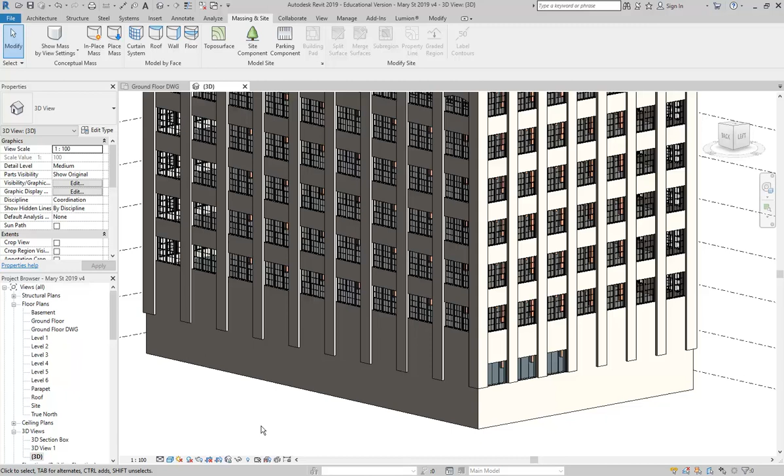Okay, so I've got my building shell starting to come together, but before I can go much further with these storefront openings, that I'm just coming back around to show you on the corner there, Reservoir and Mary Street. You can see that most of them are at the same street level, coming around to Mary Street, but then it starts to rise really from about here, and you should look at putting in these other different openings

as well. So you've got a garage opening there, and these, do you know what these things are? Yes, they're fire escapes. So that's really important. For interior design, you will often need to think about those things. I know sometimes people will tell you you don't have to do the hard construction work, but having done your construction classes earlier today, you definitely need to look at that as well. And so that's going to be part of your design, working out where the fire escapes go in.

Have you had a look at the requirements for fire escapes? Okay, you should be starting to look at that. So it's in volume 1 of NCC, BCA. Do you know which section of volume 1 it is? There's some light reading for you. If you haven't read through this already, you need to go and read it. It's section D. So for interior design, you're expected to know that section almost off by heart, and so you need to start looking at that as well.

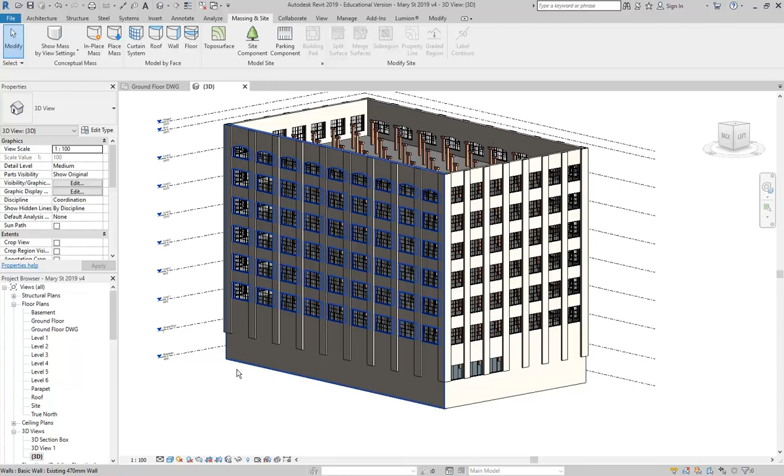So we've got the street level now coming up to the corner there, where it's a metre roughly above ground level. I'm just going to round it off and make it 1,000, or a metre. So at that corner point, that's what we're aiming for, that metre above the interior floor level. So back to Revit. I'm going to go to, sorry, not the ground floor plan, I'm going to go to my site floor plan.

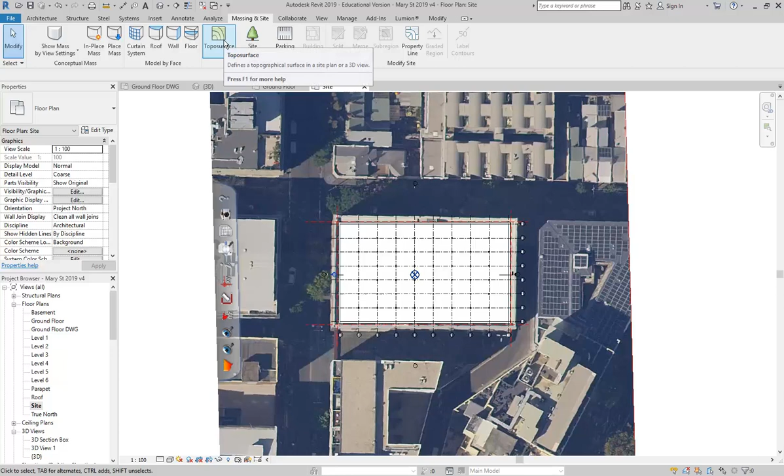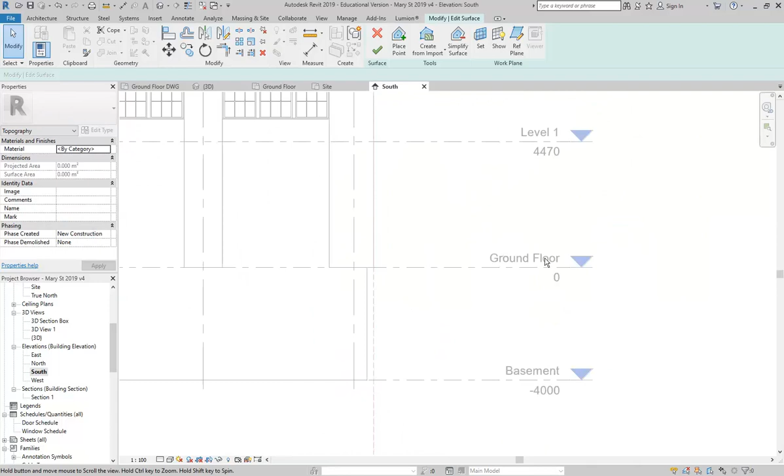And then you can see on the Massing and Site tab, you've got the Toposurface tool. Now, notice it begins with this place point option, and then you can see the default elevation height is 0. So before I place a point, I'm just going to switch to an elevation so that you can see my levels. Your levels probably will be the same height, but you just need to be aware of that. So I've got the ground floor there at 0,

and again looking at the Mary Street and Reservoir Street facade, you can see there's not much of a step, but even though this is almost flush, you can see here there's a little bit of a step over there. So how high do you think that step would be? Yeah, a brick, or 10 centimetres, that's good. So a brick is about 76, 86 with mortar, but if you round it off to 100, that's fine, and it's good to work in round numbers, so 100's good.

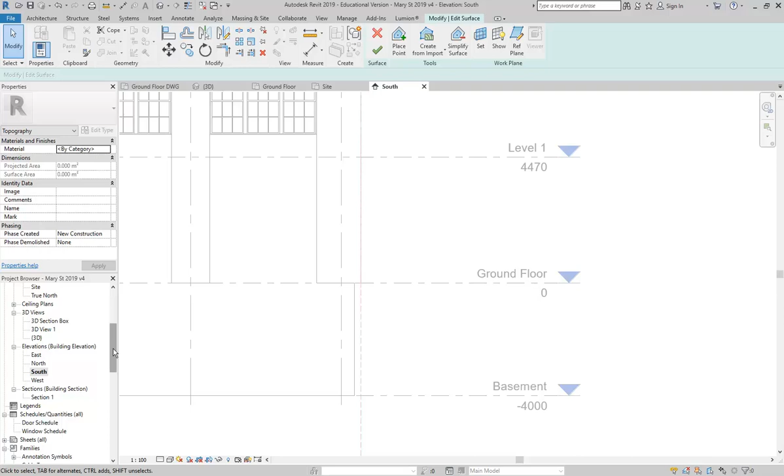And so it's also good to have it below the floor level, because if we make it flush, then our ground surface might cover the floor inside anyway. So again, you need to just think about the heights before you go and start placing points. So I've switched back to my site floor plan, and now notice I've lost that option to change the elevation because I've gone and used some different tools.

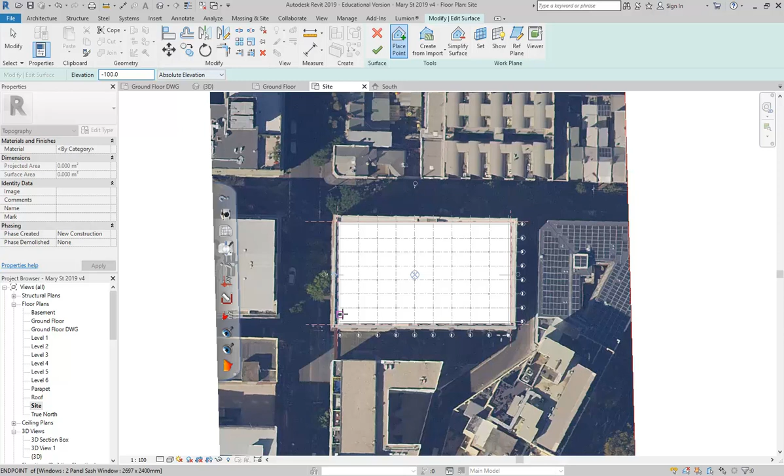So you've got to know that it starts with that place point option, but if you go and do something else, you just need to choose it again, and then you get the option to set the elevation. So I'll make it minus 100. Yep. And then this is the facade I was just looking at. So here is the Reservoir Street frontage.

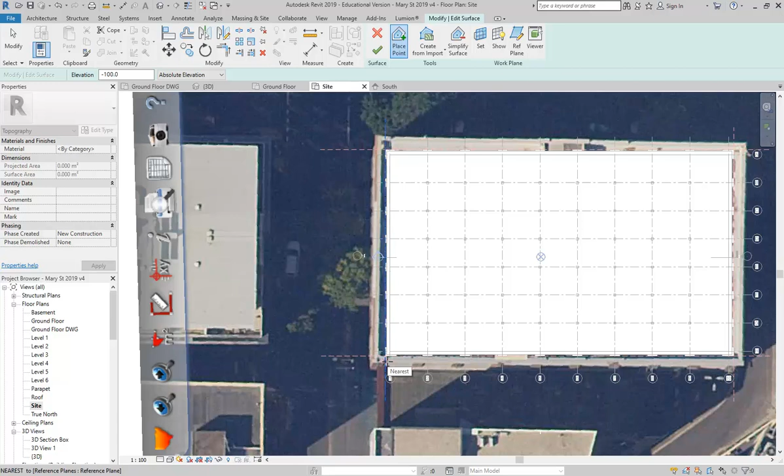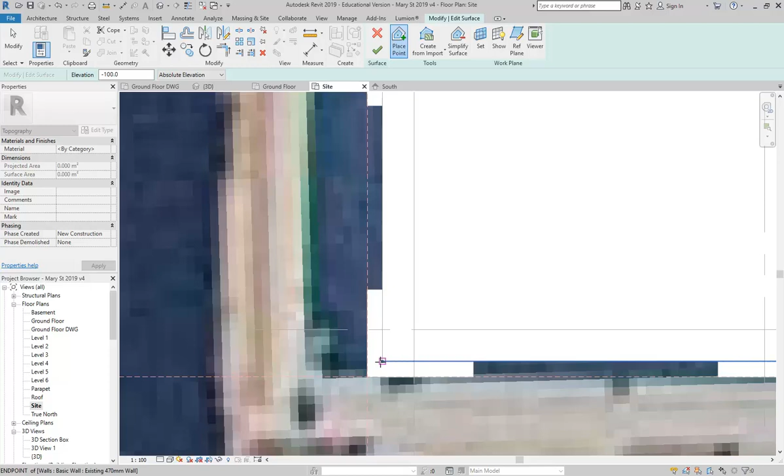And again, we said we're going to make that entire street front the same level. So here I'm zooming in just to get the corner of the building. It doesn't really matter if you get the outside or the inside there of the wall. You could do both points if you're not sure, it doesn't really matter. And I'm going to go to wireframe so that you can see the points as I place them.

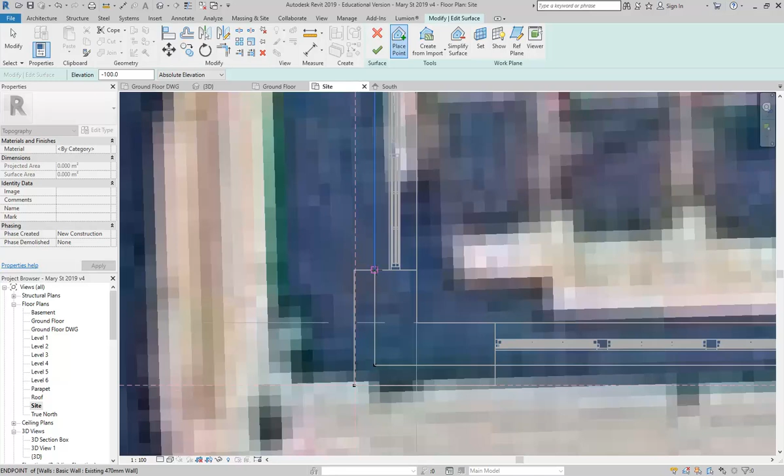So there, zooming in a bit, you can see those two black dots are the 2 points. And because I've only placed 2 points, there's no surface yet. You just think about it logically, you can't have a surface with less than 3 points. So you'll see when I click the third point, I'll just do another one here, then I get a surface. It's just like joining the dots.

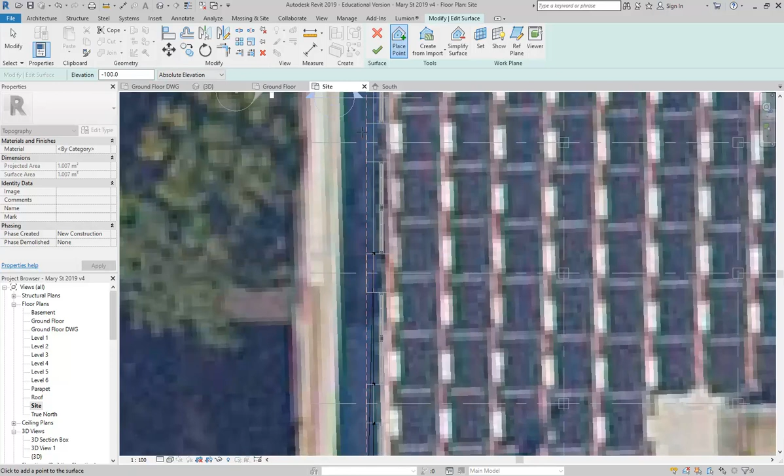So then I can keep clicking more points, just a few along that facade. You don't need to do every single point. And, okay, so at the moment it's a very thin little strip of a surface. So to make it a bit bigger, we want to see the streets and the other things around the building. So I'm going to click some points over here, and then maybe over the other side of the street, and just keep bringing that out. And you can see then that we've got a surface now that's much larger.

And again, you need to think about the reality, which is that this street would probably slope down from here. Right, if we know that the high point is up here, the ground probably does slope down in this direction generally. And if you've walked there, you'd know it definitely slopes up from, you know, this is where Central is down here, and the street slopes up this way. All those streets in Surry Hills coming up from Elizabeth Street slope up towards, what's the top of the hill there?

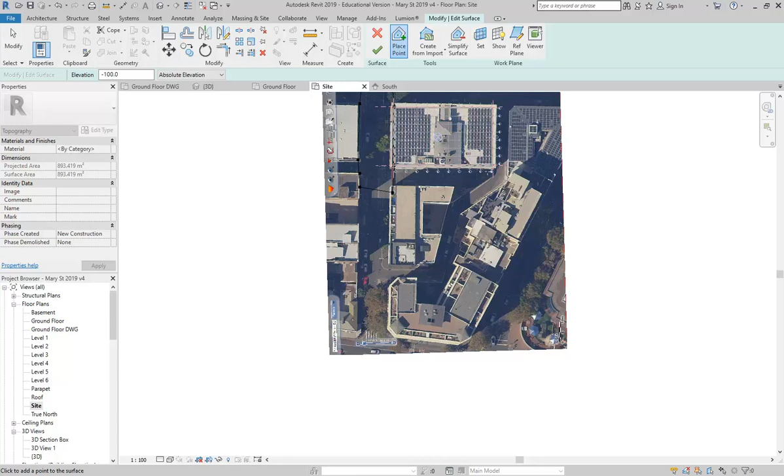Obviously don't go to the area much, but some of you must. What? No one goes to Surry Hills anymore? What? Okay. Oh, right. Okay, yeah, they've killed it. Now that people don't go out in the city anymore, I suppose people don't know. But this used to be one of the main areas people would go out. And so there are lots of pubs and things on the main road up here. Oh, no, sorry, further up the hill. So it's quite a well-known street.

Crown Street is the main street that runs up the top of the hill there. Right, and you'll see it's a big slope. So the hill runs up Reservoir Street to Crown Street at the top there. And that's basically the top of the hill.

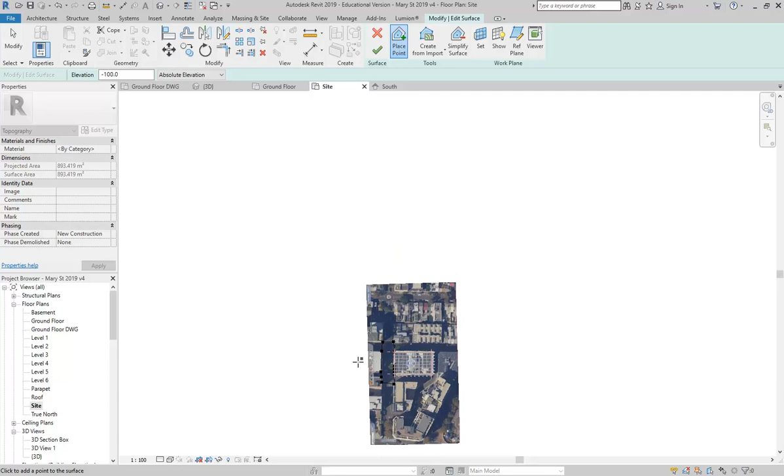There used to be a well-known architecture firm just near there called Ancher Mortlock and Woolley, which is about here somewhere on the other side of the hill. And yeah, just a good area to walk around if you haven't already done that.

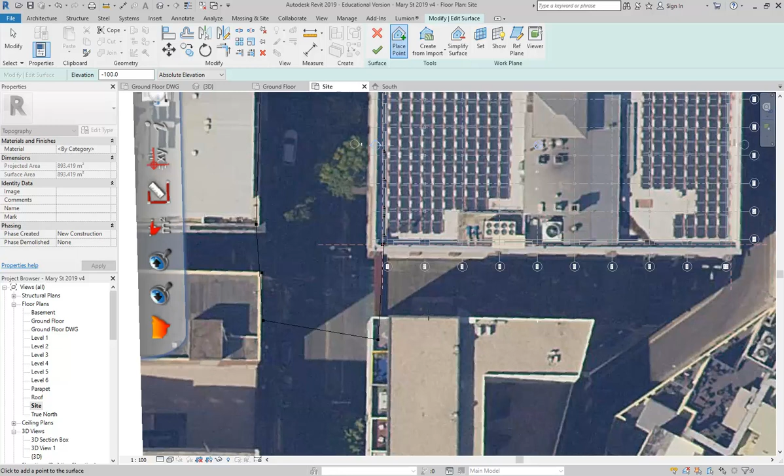And so then I'll keep placing points though at the same height. I just wanted to point out it definitely slopes, but we don't need to show that slope when it's not that close to the building. So I'm going to make all these points fairly flat, in other words, keeping the height at minus 100. But just remember, that's not the way the ground really is. We're just modifying it a little bit. And again, clicking points just to bring out the surface and give myself a bit of room around the building.

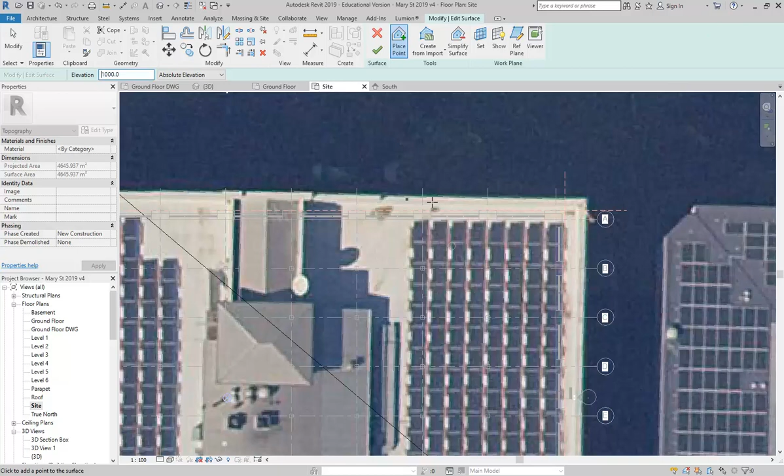And then, what height did I say we want the corner up here to be? Remember? So that's the corner where it rises. So this is Reservoir Street that I've just done. And then coming along, we've got Mary Street. And remember, this is the important part. This point's higher. That's a metre above street level, we're going to say. Again, just keep it as a round number, so I'll say 1,000. So I'm going to type in here for the elevation, 1,000. And then make that point there, the corner, 1,000.

And I'm going to click some more points near that, just to give myself more room to work with and to extend the surface out further from the building. Now, before I click a point down to the right here, I'm going to change the elevation again, this time to about 500. Because if I leave it at 1,000, then it'll slope from this side to the left. And I don't want it to, I want it to slope from the top right down to the bottom left. Something like that.

And then again, just to make it even better, I'm going to click another point inside the building where I think it'll be about 500. So if I said this is 1,000 and that's 0 or minus 100, then 500 would be roughly in the middle of the building, or maybe about there, just use your judgment. And another couple of points over here. And notice how the contour line is changing.

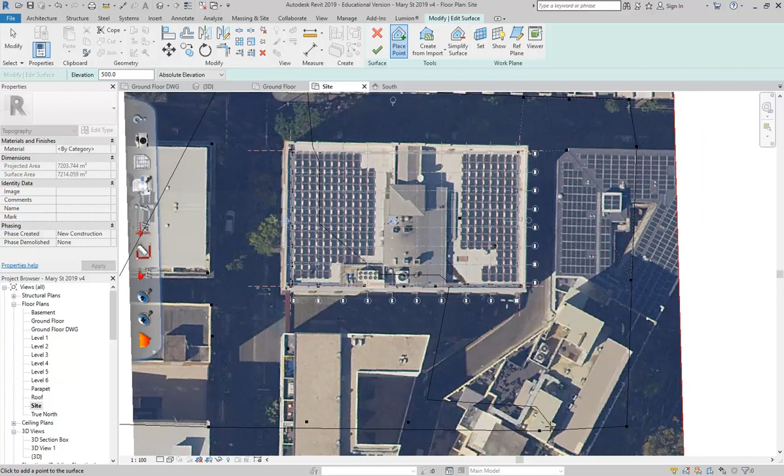So it generates the contour lines automatically. And you can control it, so if you want to change the height and see what happens, if I make this say 300, and then I'll put some points here along the road, you can see that that contour line, again, is going to move. Make it maybe 100, and then put another point about there, about here.

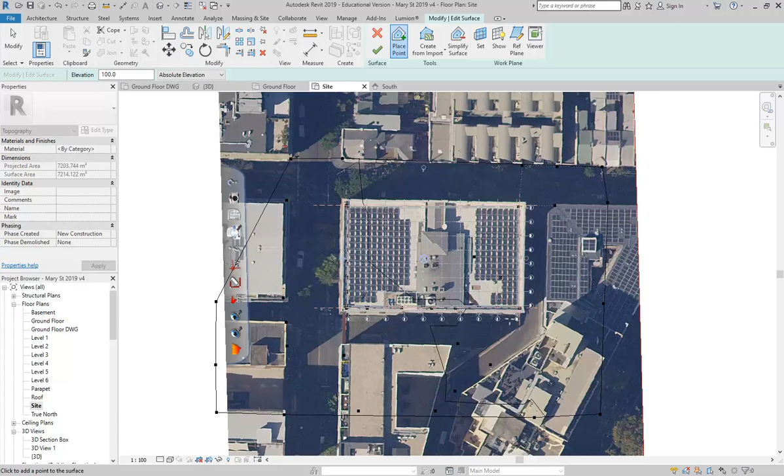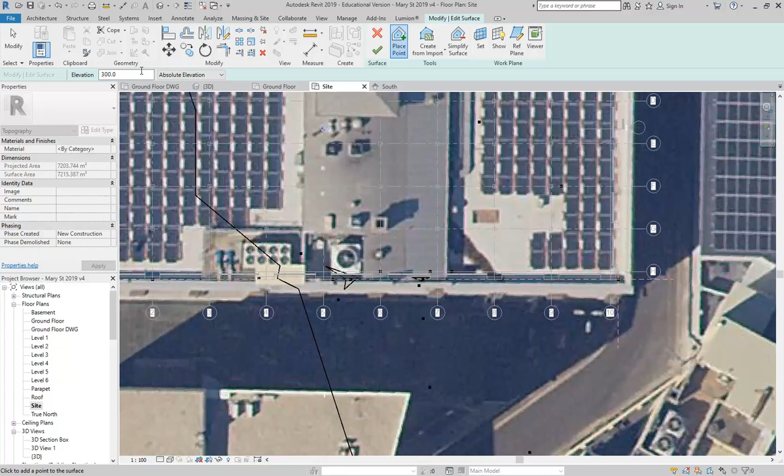And there we go. That one's a bit annoying, so I'll just maybe put in 300 again, and then just put a few points around there. Don't know why that won't go away. It's a bit unpredictable sometimes, the way it does this. Yeah, that'll do.

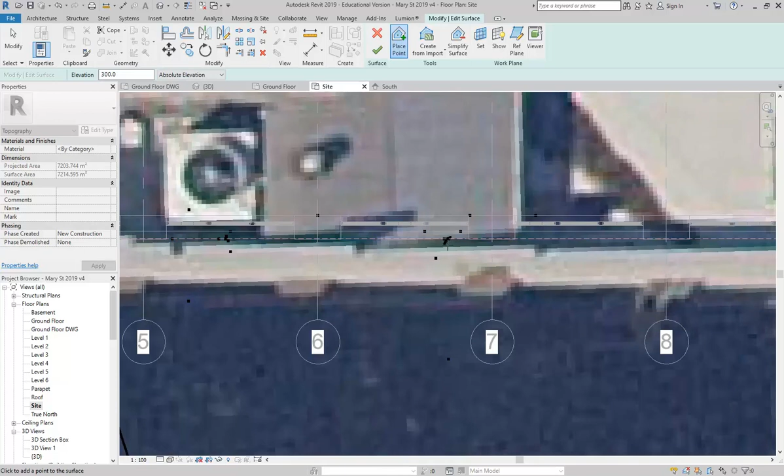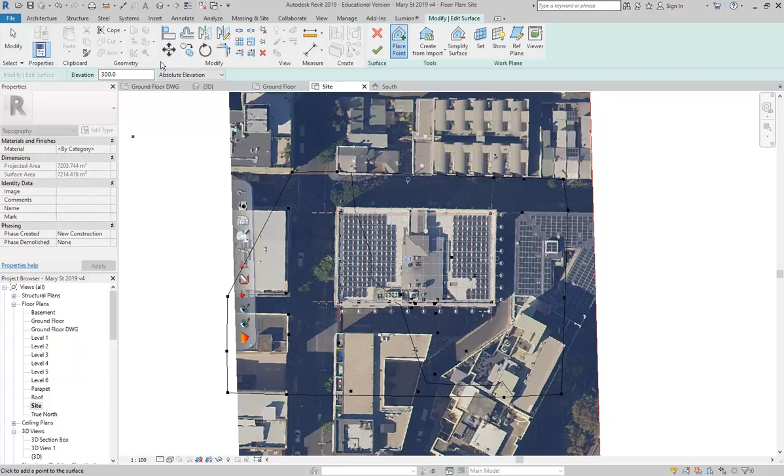Don't be too fussy about these points, and as long as you don't put in huge variations in height, it won't really matter too much, as long as you've got the 1,000 at the corner here, minus 100 along Reservoir Street. But then, well, actually what I'm going to do is, before I show you the next part, I'm going to finish that and show you how the surface looks.

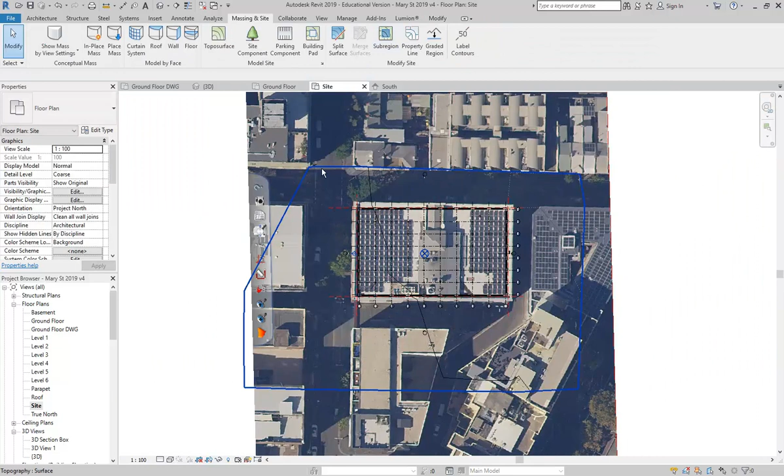So to do that, I'm going to go to this north elevation, and you can see there now the ground surface is sloping. But is that what we want? Do you want it to slope from the corner there diagonally straight up to this corner? Would you want that?

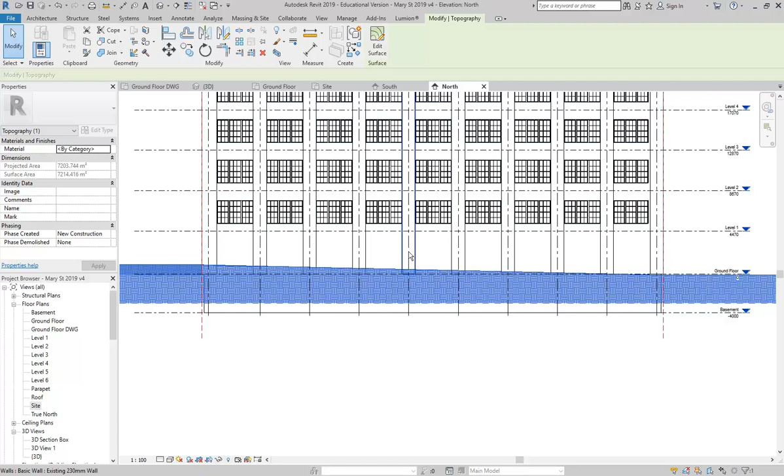Well, kind of. I mean, that's the way it would have been originally. The ground probably would have sloped fairly evenly, but because we want some entrances that are going to be flat, we don't just want that to be a single diagonal slope. Right, so you might have doors here and here. So then you can't have a door with a diagonal entrance or a sloping entrance. Okay, so we've got to flatten some of this out, or grade it, that's what it's called.

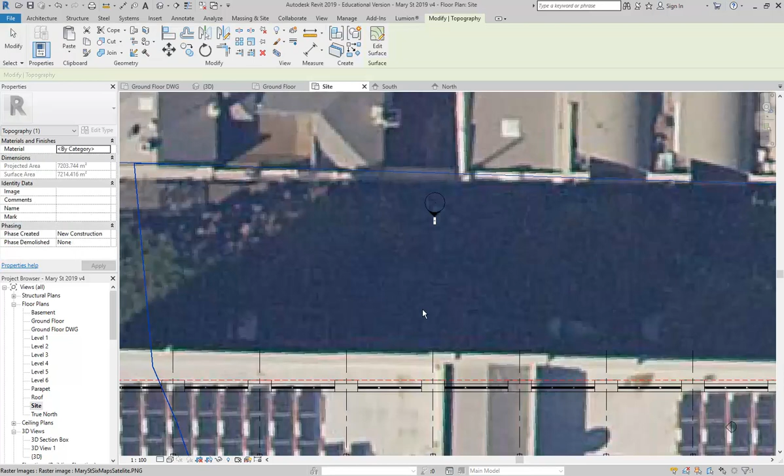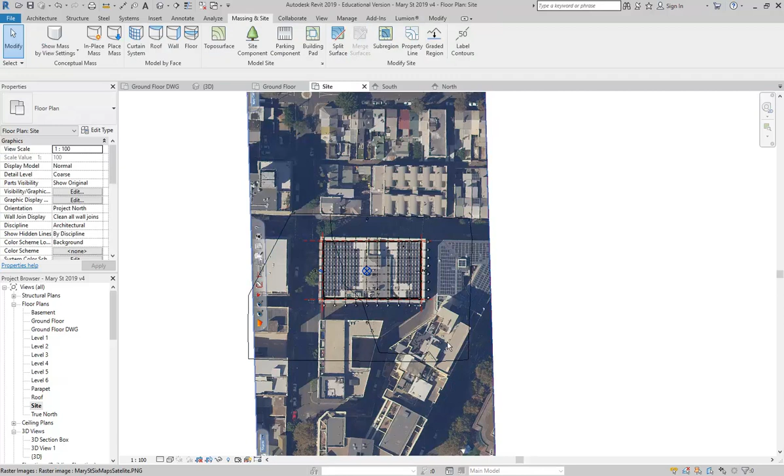So I'm going to go back to my site floor plan, select the topo surface, and then you can just go back and edit the surface once you've selected it. So you'll always get that option. When you select a topo surface, you go to edit surface, and then place points again, and you can keep refining that surface. So I'll change, well, the elevation there, 300, that might be pretty good. So for this area, I might put a couple of points in.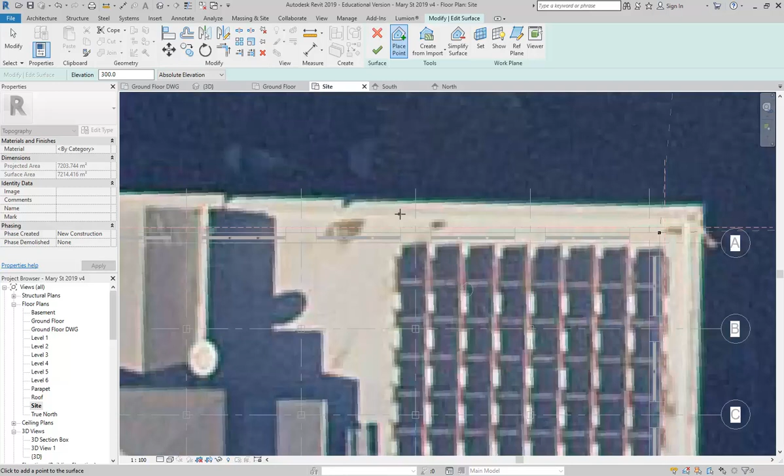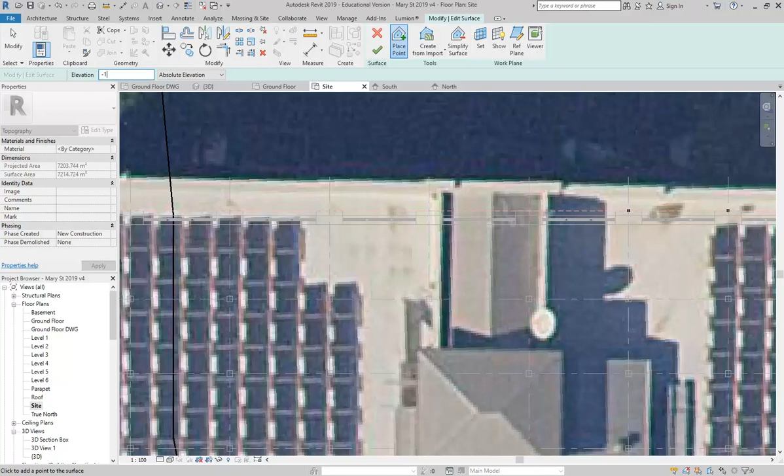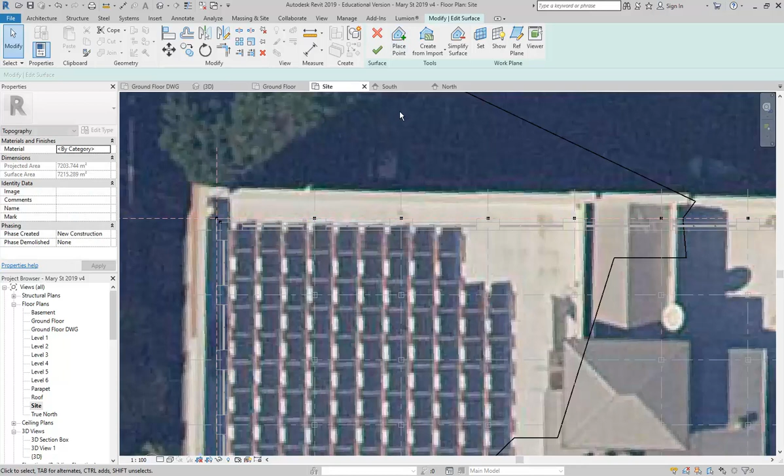And then let's say I want my hotel entrance to be about here. So for the sake of simplicity, let's say I want that to be at the same level as Reservoir Street. I'll make that minus 100. And I'll put a couple of points in around there, and you can see it's making some pretty dramatic changes. So if I go back to my elevation, well, when I finish the surface, you can see it doesn't really look that different yet. And that's because of where the elevation view is.

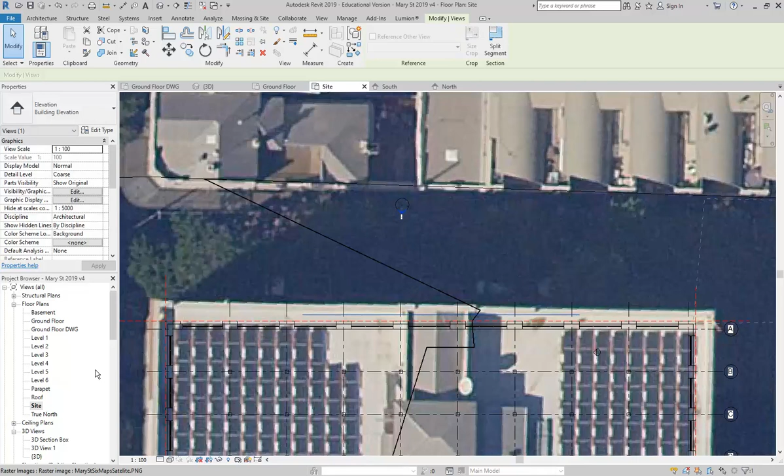So I'm going to the site floor plan again, and I'm going to select this elevation, and that's this arrowhead here, and I'm going to drag that cut line so that it's closer to the building, and then back to my north elevation, and then you can see the changes. Right, so does that make sense? When you start putting in different points, you just get more control over the height of the different parts of your surface.

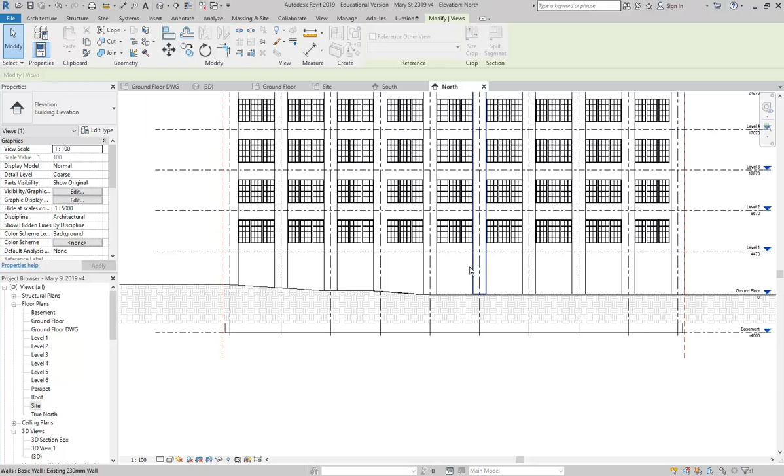And then I'm going to show you a really good trick you can use to make all these walls come down. Right, so remember, I've made the ground surface minus 100. So all of these 230mm walls need to come down to meet that surface. So I'm just going to select one of them, right click, and then go to select all instances in entire project, to select every single one of those walls. There's 36 of them you can see over there. And then I can just make the base offset minus 100.

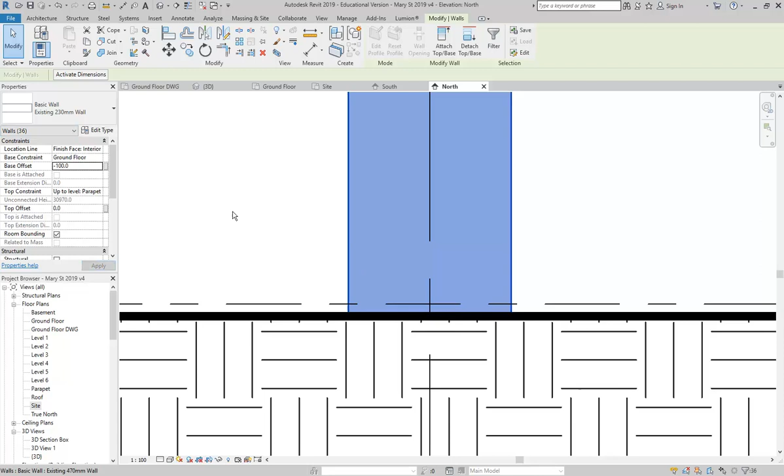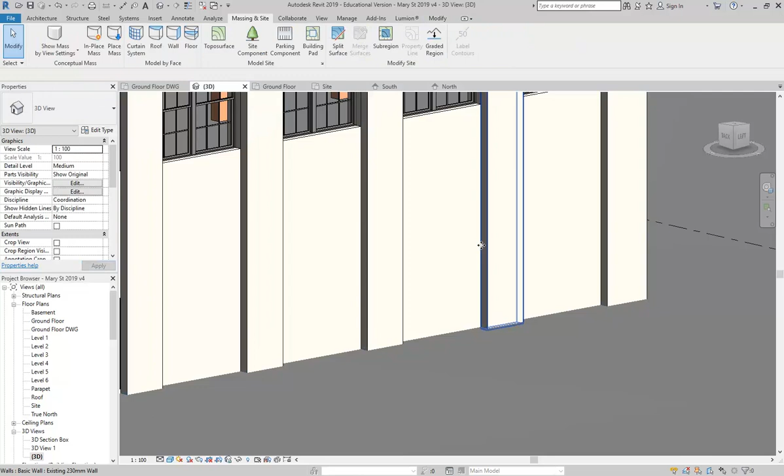So in the 3D view, you can see now they're all touching. Well, these are right on that surface. You can bring them down a little bit more if you want to even. So you can right click, select all instances in your entire project, and let's make it minus 150. Let's just make sure it goes through the surface. That looks better.

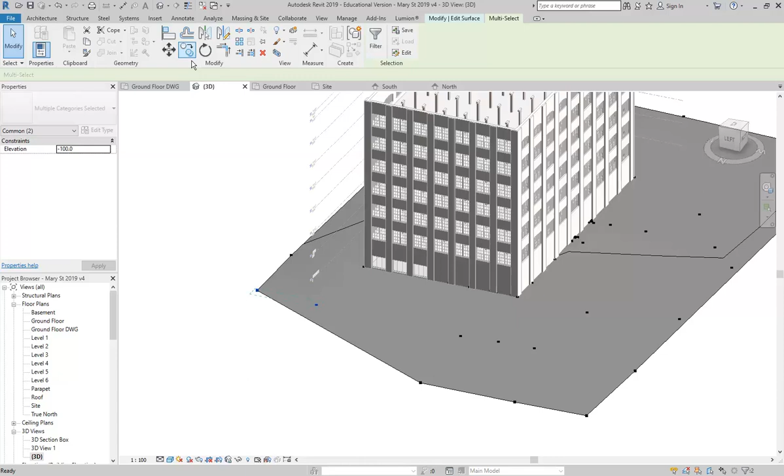Okay, so later you'll see you can easily keep extending that surface. I'm not going to do very much more with it now, but I'll just show you an easy way. If you do select it and then go edit surface, you can always copy points. So if you copy points that you've made previously, that works of course. Okay.

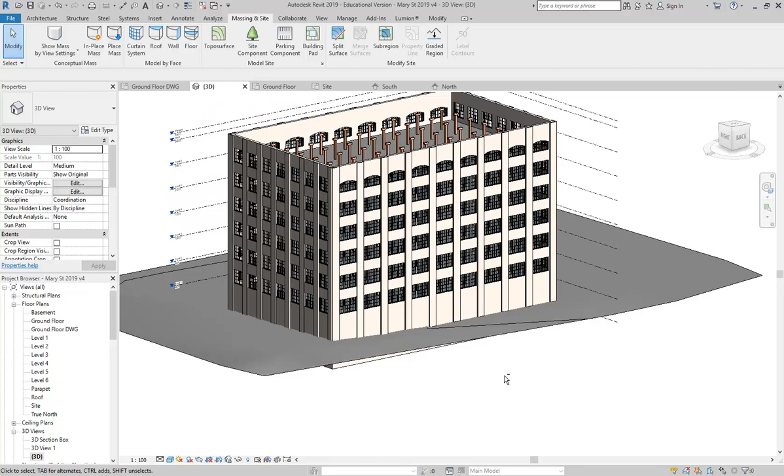Yes, that's right, exactly. Yeah, that's right, doesn't need to be even. That's good. Okay, but then what you're going to see, and this is what I want to show you before we do the curtain wall.

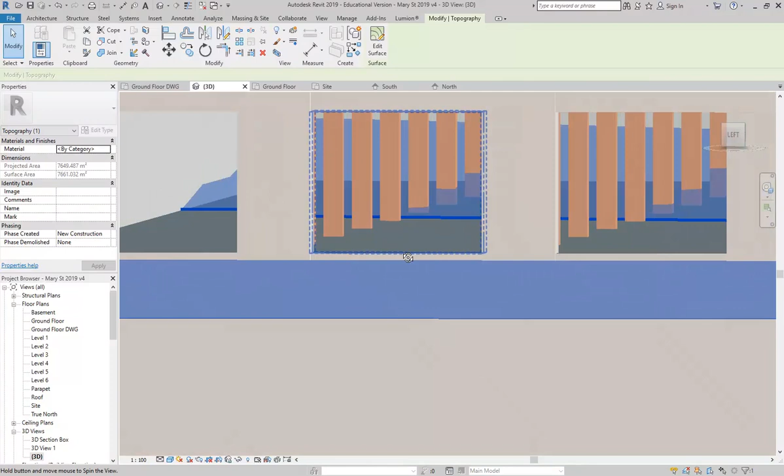If you look inside your building now, what are you going to see? Yeah, you'll see it coming down, and then you're going to see what would have been there before they built the building: the ground sloping across that whole area. So I'm just orbiting so that you can see that. So inside the building, we've got all this earth. And they, of course, would have excavated to allow all the interior space for the building.

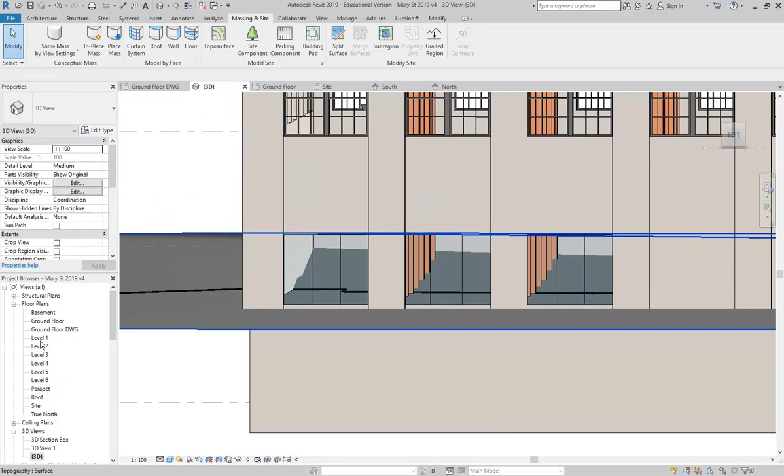So how do you do that with Revit? Do you know the tool you use to excavate your Toposurface? What's the tool? Oh, you haven't done this? Okay, right. So if we go back to site, there is of course a special tool that you use to excavate on the Massing and Site tab called Building Pad.

Okay, so building pads work only with Toposurfaces. So building pad there, and I'm drawing in my site floor plan so that you can see everything. But then you can see the level there has come up with ground floor. Where do you think we want our pad to be? Exactly, basement. We're going to excavate all the way down to the car park, so that's the basement level.

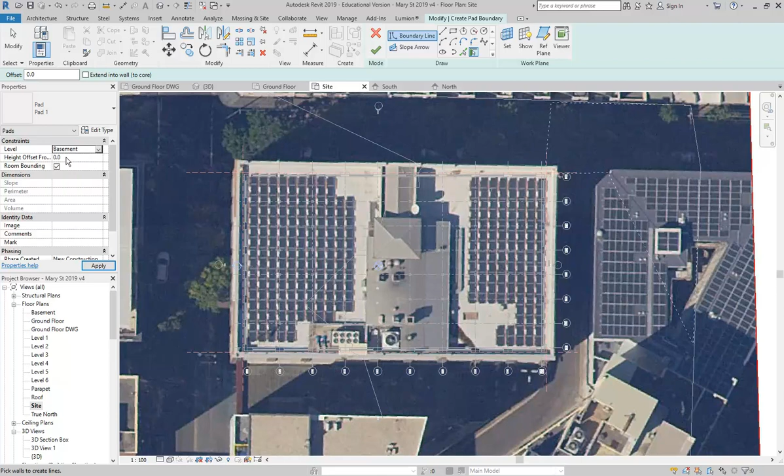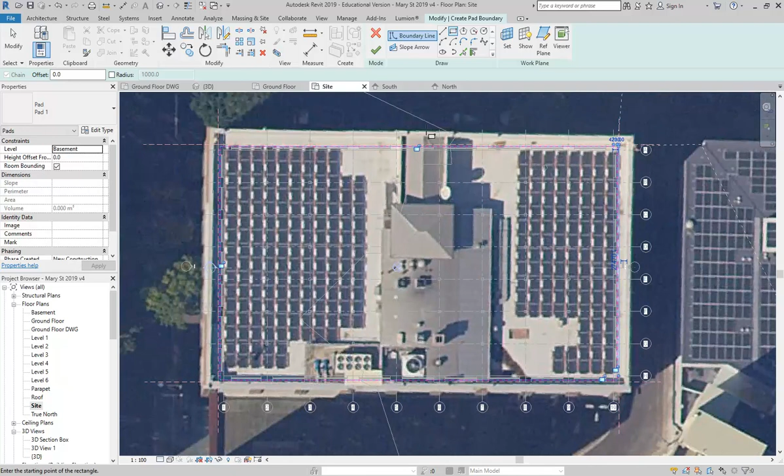And then I'm simply going to draw a rectangle. So with the rectangle option there, I'm going to trace just the main walls. You don't need to go all the way around your piers. So just like that. Just a rectangle. Tick, finished. And now I'll show you in the section. Okay, it was shaded here, it's probably easier to see.

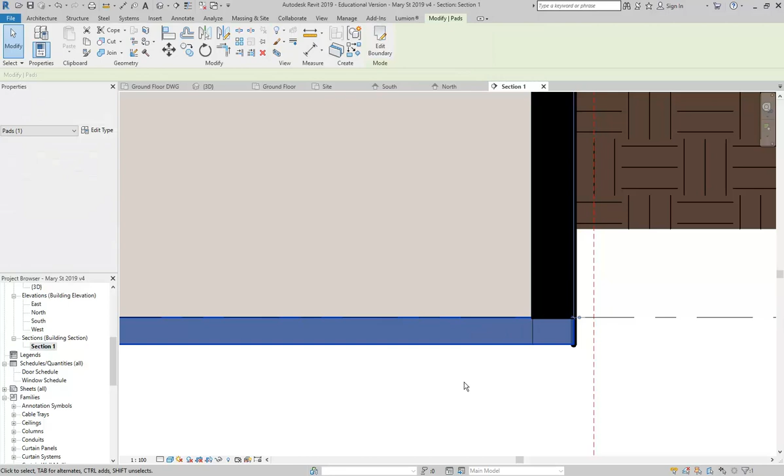There we are. Right, so there's the ground surface. And you can see now it's been excavated, so there's the pad. I didn't change any of the settings, so that's just the default setting for the pad, which is about 300 or 400 thick. Yeah, 304 thick, it's a foot. So without that pad, if I delete it, we've got the ground surface there. But with the pad, it excavates the ground.

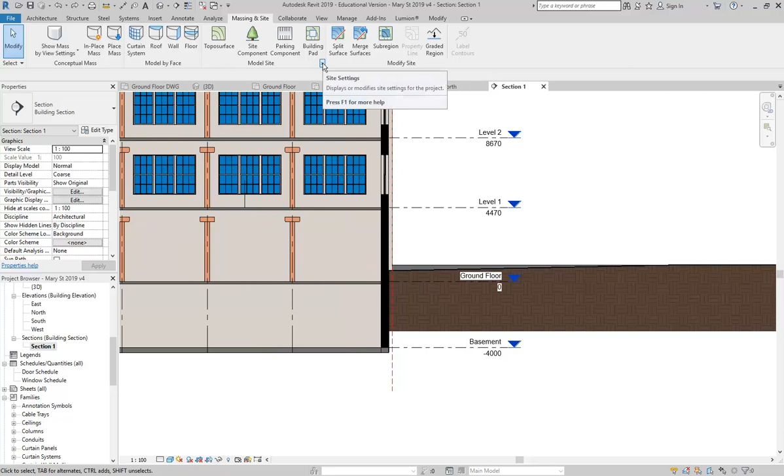And so the final thing may be just to make the site look a bit better. Notice how it only goes down so far. So have you had a look at the setting that you use to change the depth of your Toposurface? It's one that's not so obvious. It's on the Massing and Site tab. You've got this little down arrow on the Model Site panel. See there, that angled arrow for your site settings? And there you can see why it only goes down that far. It's on minus 3,000. So I'll change that to minus 5,000.

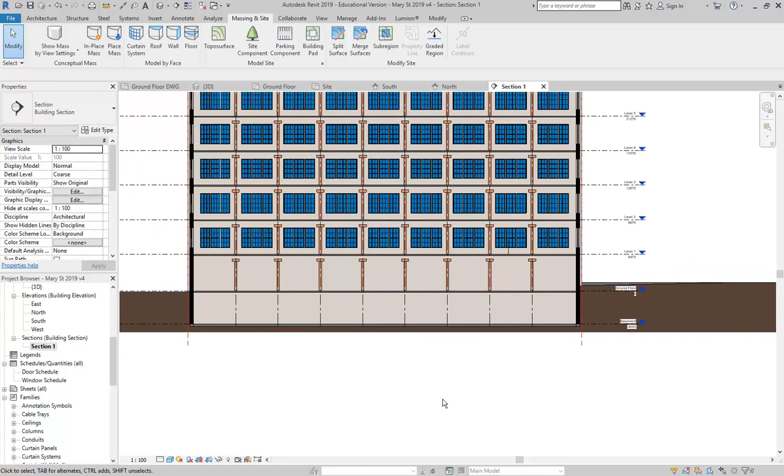Right, and that just brings that hatch pattern down. And there we are. Also gives you a chance to have a good look at your interior, start to think about your heights and the way everything's going to go together, and whether you're going to keep the ceiling as a separate element or have the floor joists exposed and try and have your surfaces exposed as well. And you'll see then why we've got the top of the columns there with a gap between that and the floor.

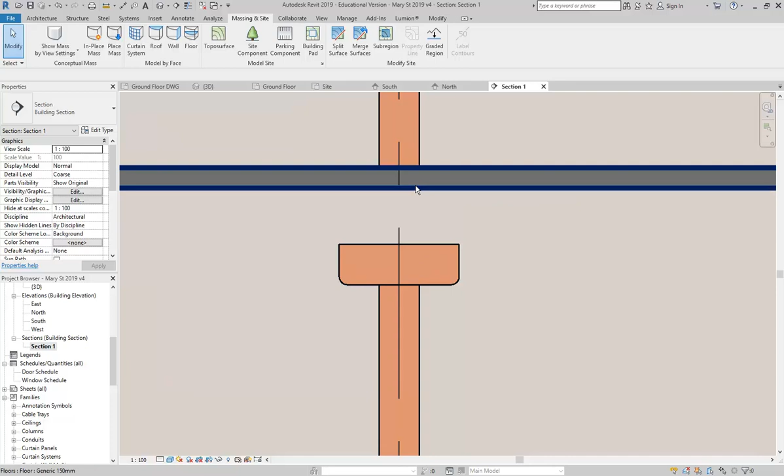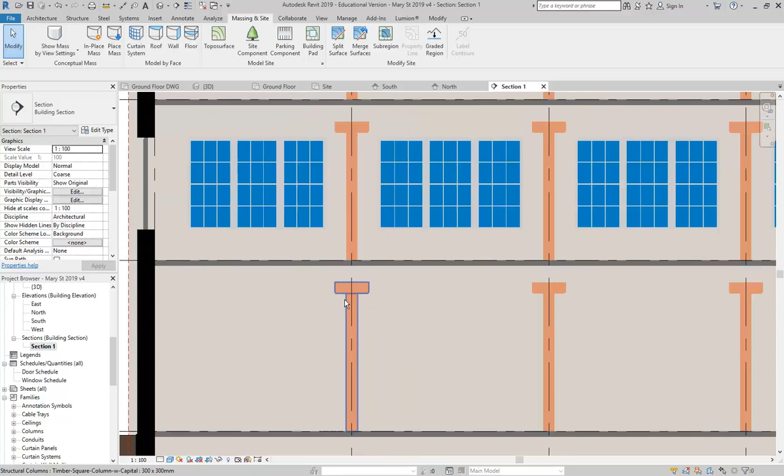Well, because we've got the beams and the ceiling structure that need to go in between. So they could be exposed or could all be concealed. So we'll go over the ways you model that. Yeah, so make sure you've had a good look at the section, and at this point you'll be focusing mostly on the topo. Well, there's no beams there yet. That's what I'm saying. So this is the column. Oh yeah, no, so there we haven't got the beams in yet. Yep, so there'll be concrete columns for that one. So that's probably all you need to do first before we can get back onto the curtain walls. So I'll give you some time to get that done.